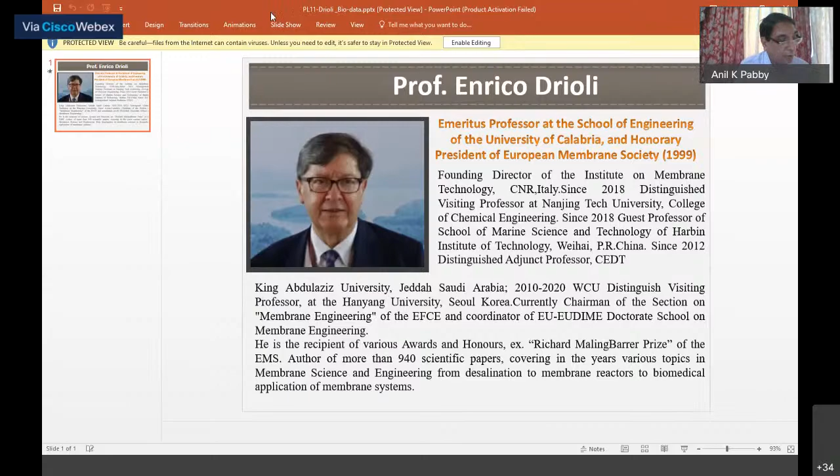Professor Enrico Drioli is the emeritus professor at the School of Engineering of the University of Calabria and honorary president of the European Membrane Society. He is the founding director of the Institute of Membrane Technology, CNR, Italy. Since 2018, he's a distinguished visiting professor at Nanjing Tech University College of Chemical Engineering, and since 2018, a guest professor at the School of Marine Science and Technology of Harbin Institute of Technology, China. Since 2012, he is a distinguished adjunct professor at CEDT. He is also currently chairman of the section on membrane engineering of EFCE and coordinator of EU-EUDIME Doctorate School on Membrane Engineering. He is a recipient of various awards and honors, including the Richard Maling Barrer Prize of the EMS. He is the author of more than 940 scientific papers covering over the years various topics in membrane science and engineering, from desalination to membrane reactors to biomedical applications of membrane systems. I am very fortunate to introduce Professor Drioli, and I request him to start his presentation now, please.

Thank you very much. Pabby, it's a great pleasure for me to participate in this conference. Sorry that it's only a virtual presence and not in Kolkata, but I hope we will have the opportunity of meeting soon again in a real, normal way. What I'm going to discuss today is the state of the art of membrane engineering, and the contribution membrane engineering is giving to the growth of the sustainable industrial world we are living in today. But what is more important, from my point of view, is to try to show you not just what has been done, but what is going to be done in the next decades. Membrane engineering is not at steady state, it's not at the end of its development. It's just, in my opinion, at the beginning.

If I can have the first slide... can I have the first slide? What is it? Sir, your sharing has stopped. Let me try to share again. Yes, yes, is it okay now? Yes, now it is okay, sir.

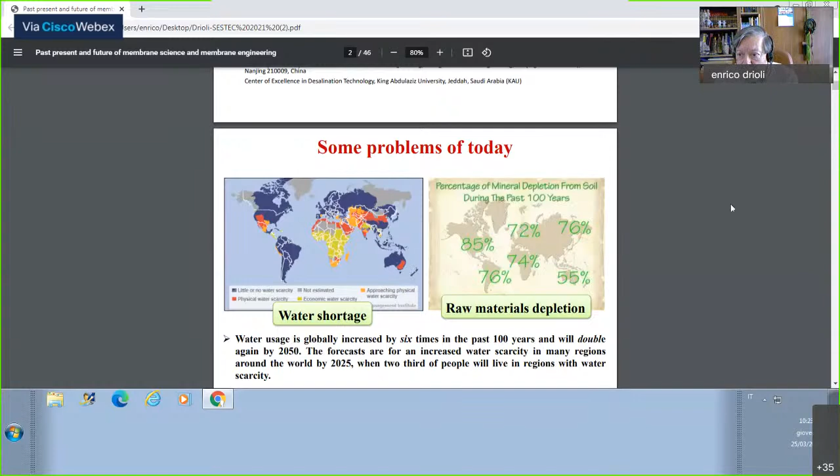Everybody is familiar with the fact that we have significant problems today, particularly water stress. Water shortage is one of the main issues. However, there are other topics that are a little less familiar to the large public. Another issue where membrane engineering will have a role is raw materials depletion. As you can see here, in the last 100 years, from 85% to 55% of the minerals on Earth from traditional mines have practically disappeared. We now have a significant necessity to find a solution to this problem, just as for water stress. It's important that these two problems can be correlated.

Now, what is important is that if we don't do something to solve the problem of recovery of these minerals, in a few years, from 10, 15, 20 years, these minerals will disappear. All of them, everything that we are losing during traditional way of doing, basically at the end are in the ocean.

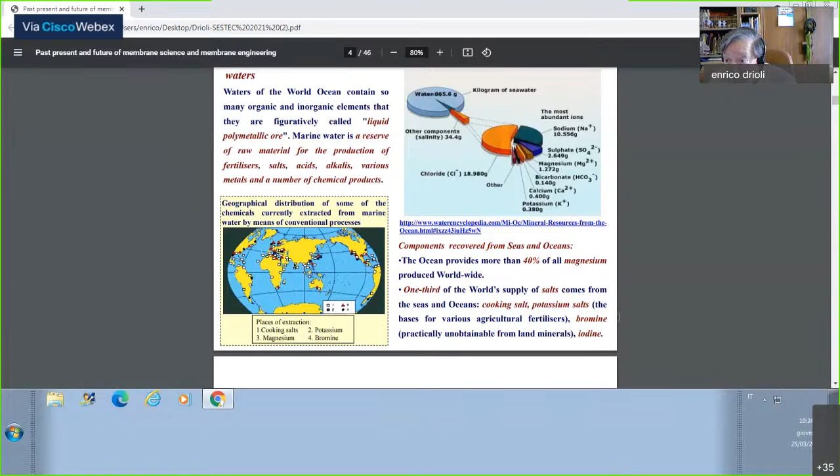And that's why we can call the ocean a liquid polymetallic ore. Some people are already using this kind of figure. We already are trying to recover some minerals from the water, from the sea, from the lakes, from rivers, but this only for few minerals and traditional ones, as potassium, as iodine, sometimes sodium chloride, obviously.

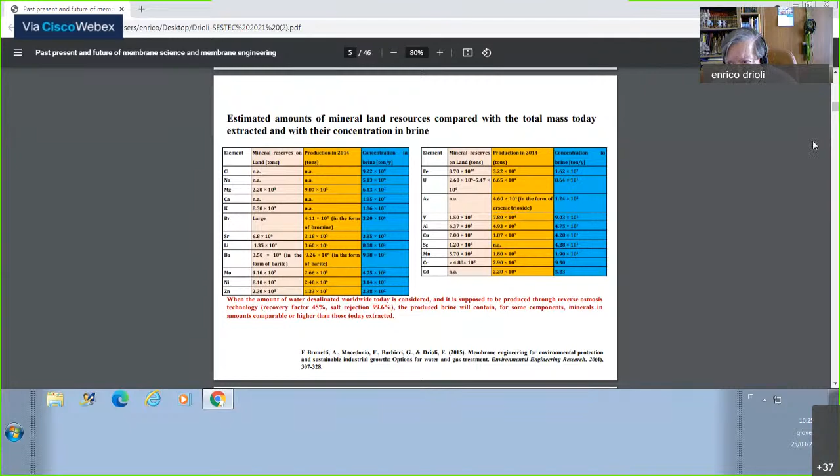Today it is called a problem, the brine disposal problem, which is growing with the large growth of desalination plants. But in perspective, this brine will be the most important aspect of most part of desalination. Desalination will not be for producing fresh water. It's also fresh water, but mainly will be to extract minerals from the liquid phase, from the sea, from the lakes, from the rivers, etc.

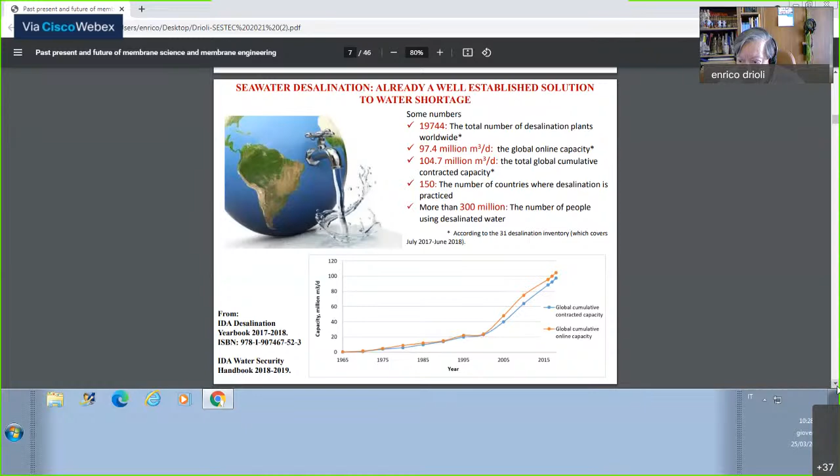And if you start to work on them, that will be a significant contribution to minimize the disappearance of minerals that I was mentioning before. Reverse osmosis is a dominant technology. However, we still have problems to be solved.

Otherwise, you cannot discharge the brine on the land or back in the sea. You are going to destroy the bottom of the sea. So that is a problem, and it's an additional cost.

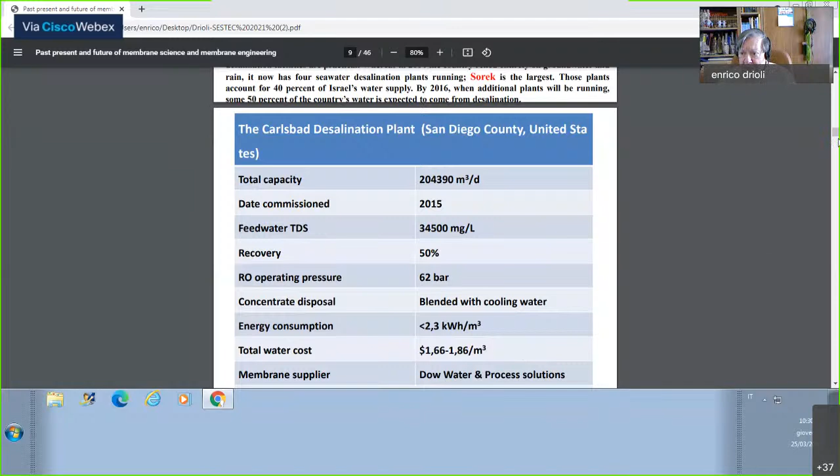One way to solve the problem is the one I was mentioning before, trying not only to look at the fresh water you are producing, but also to look at the concentrate, the brine, for minimizing the overall cost. Just to give you an example of what is the expectation, assuming the plants as they are today, as the one in Sorek.

You can see here that during this year we have significant growth of the seawater desalination RO plants in terms of capacity. The plants today are mostly of the order of 700,000 cubic meters fresh water, approaching about 1 million, and 600,000, 500,000, etc. And this is the new one in Saudi Arabia, 900,000 cubic meters.

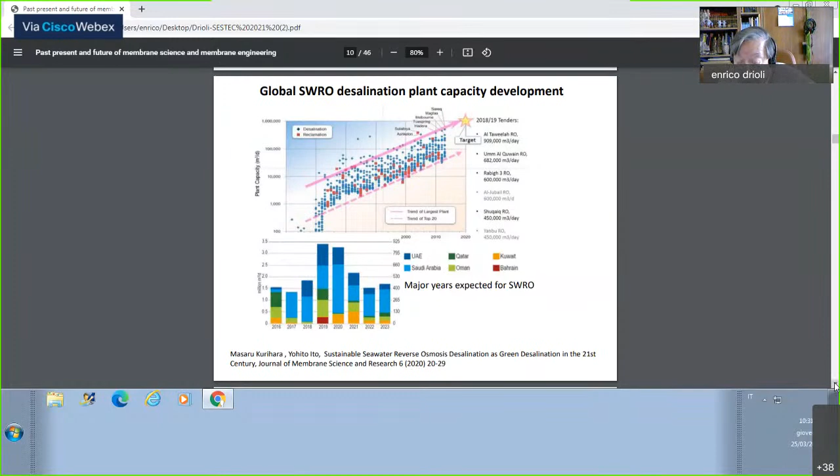So big success, but still we have to try to minimize the negative aspects. The recovery factor in all these plants is still of the order of 50%, sometimes less, and the overall problem of brine disposal is one of the major problems to be minimized and is a relatively high cost. Keep in mind that there is big success in desalination, but we have similar interesting results in other fields.

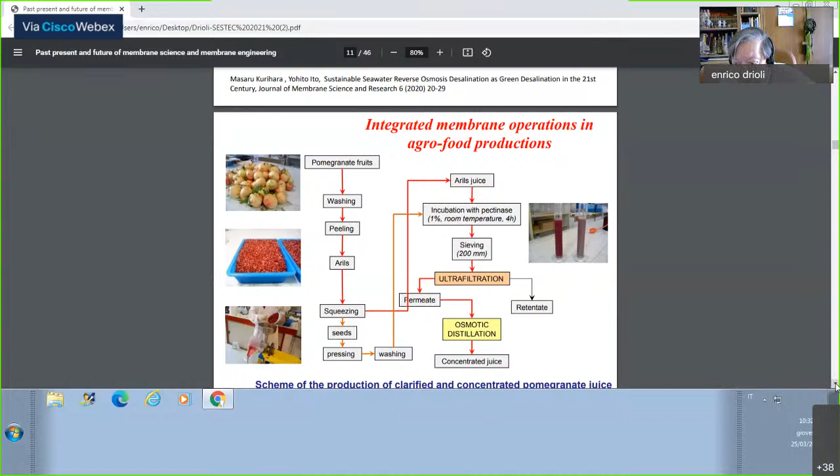For example, the dominance of reverse osmosis in desalination, today in integrated membrane operations in agro-food production, both for concentrated juice or for high sugar content, is becoming more and more traditional. Less familiar to the large public, no big advertisement on this kind of activity, but apple juice, orange juice, and many other juices today are also produced by combining different membrane operations such as ultrafiltration, reverse osmosis, and osmotic distillation if you want to approach a high level of concentration.

So this is not only desalination.

When we are talking about membrane distillation, I assume most of you are familiar, but it's interesting to notice that on one side RO is already a dominant technology, but on the other side there is still significant progress in the last few decades. Here is the case of membrane distillation, which basically was a scientific curiosity at the end of the past millennium, in the 1990s. Starting from the 2000s, it is increasing exponentially.

That means that this process is not yet applied on a large scale, no big industrial utilization yet, but you can see here what is happening. And together with membrane distillation, you can see what is growing also, significantly less, is the membrane crystallizer, which is nothing more than an advanced utilization of the basic units and the basic concept of membrane distillation.

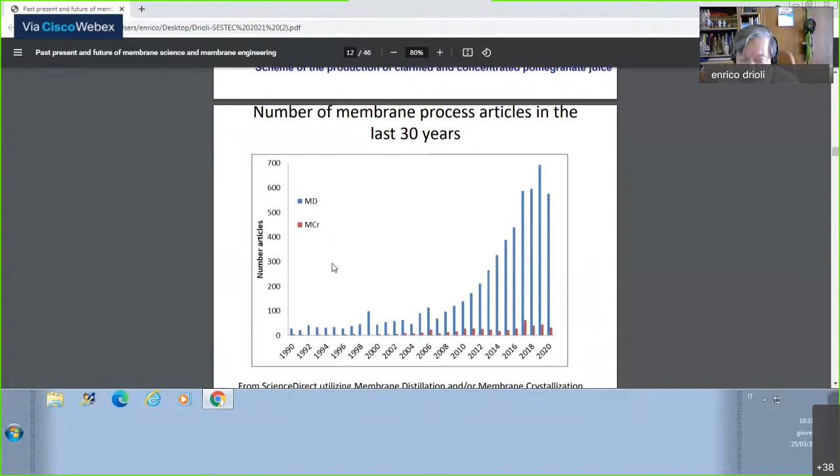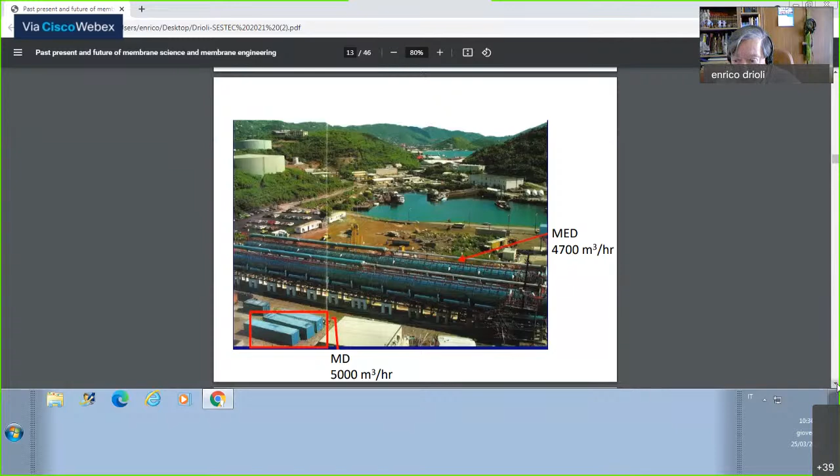To give you an example of what is happening, the motivation for this, here's an interesting comparison between the classical thermal system - I mean 4,700 cubic meters per hour, that is the unit - and the footprint of the same 5,000 cubic meters per hour MD, doing the same with the same productivity. Footprint is becoming today a quite significant parameter in terms of cost, the final cost of the water you are producing.

It's interesting that the concept I was telling you before is becoming very popular in some countries. In Korea, they are talking about the third generation desalination system already, in which reverse osmosis is already present for producing fresh water, but the concentrate of RO is no longer a problem. They are not speaking about the brine disposal problem anymore.

They're talking about what to do with the concentrate, using membrane distillation, pressure retarded osmosis, and recovery, crystallization, and all the membrane distillation units for producing more water. That means increasing the recovery factor, producing energy, and recovering resources through membrane distillation and membrane crystallization systems. So the third generation desalination, a project that ended 2-3 years ago.

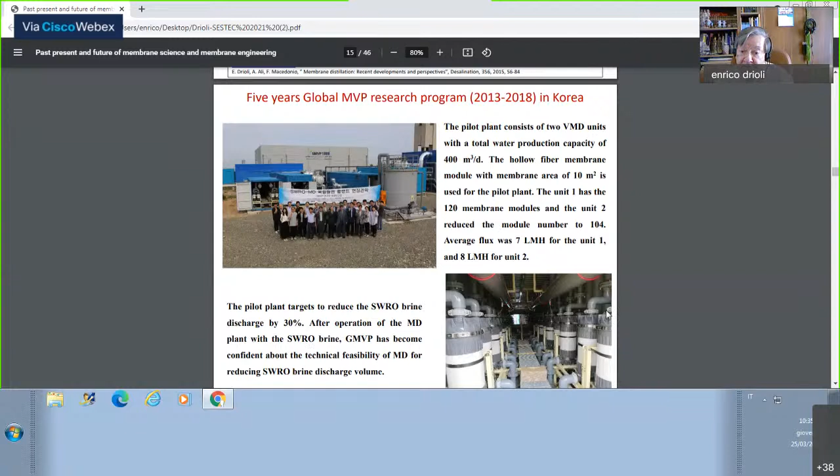Is already well accepted in countries like Korea, still at the research stage. You can see here, at the end of this project in 2018, a vacuum membrane distillation unit producing about 400 cubic meters per day was installed in the south of Korea near Busan, with interesting results: reduction of the brine discharge by about 30%, increasing recovery factor, and recovery of minerals. Quite interesting, and this kind of concept is today becoming popular in different countries.

Another area of significant success already now that we have to consider are the membrane bioreactors. You can see here this situation, a traditional municipal wastewater treatment, with 1, 2, 3, 4, 5, 6, 7, 8 different units working together.

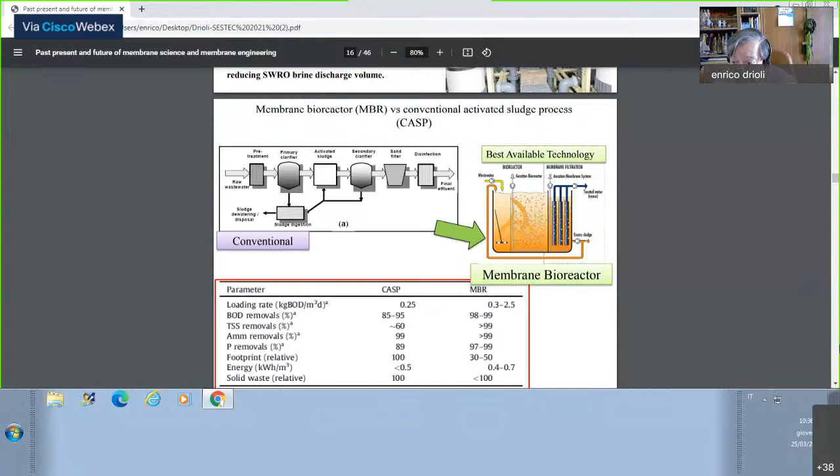If you go to the best available technology, which in Europe is considered MBR, you can have basically 1 or 2 units at most instead of 7. And if you look at the parameters, the optimization, all the parameters for the MBR are competitive or significantly better than those of the traditional biological system still in operation everywhere.

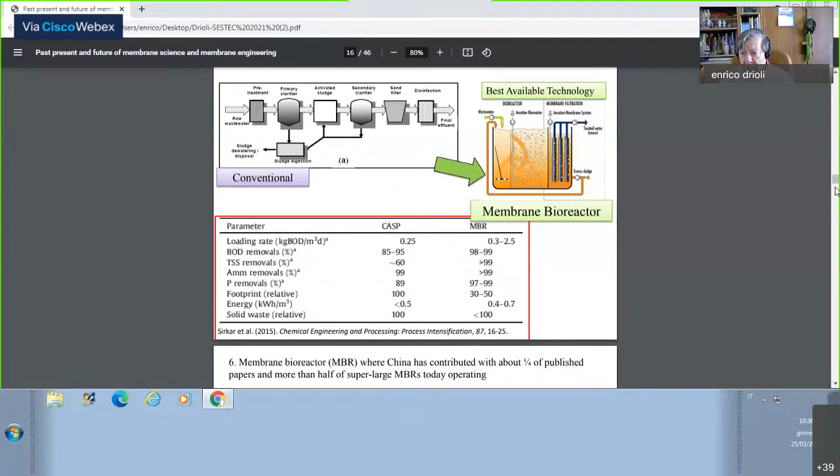It's interesting to see that the trend worldwide for growth, as we saw before in membrane distillation and in reverse osmosis, shows the same trend. Starting from this century, everything is growing exponentially. In terms of patents, publications, and large-size plants higher than 10,000 cubic meters per day, growth is exponential all around the world.

It's interesting that one country, particularly China, is working significantly with this kind of unit. They are using MBR not only for normal municipal plants, mainly utilized in Europe, but for underground municipal water, industrial water, and polluted surface water, all treated today with significant success based on MBR, and MBR of large size - not just small units. That is fast growing, unexpected 20, 30 years ago, but that is the situation.

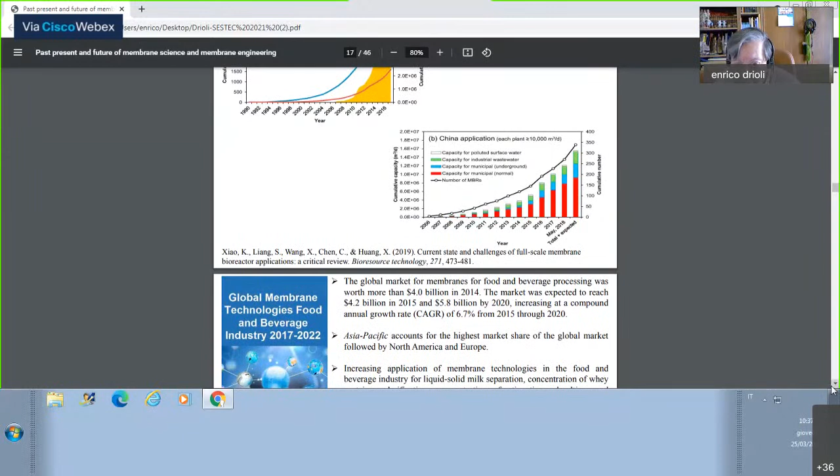I was mentioning before about food, and you can see the same in food. The market is growing, as I was showing before, based on this integrated membrane operation - something very similar to what has been happening in the desalination of seawater, and in the treatment with MBR of traditional municipal water.

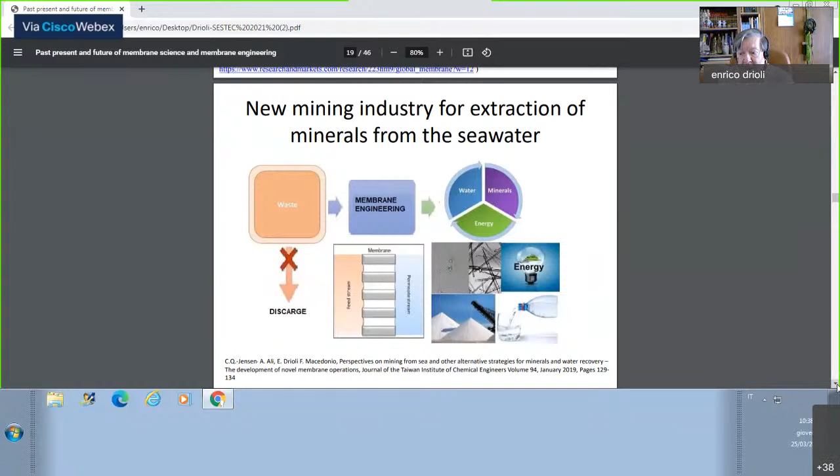In the perspective, this does not happen yet on large scale, still a project, but assume that what will happen, not too far from today, is that we can develop a new mining industry. This new mining industry will be mainly devoted to the extraction of minerals from seawater. The integration of the 3 final goals - energy production, minerals production, and freshwater production - will make the industrial sector treating liquid water quite interesting and quite profitable.

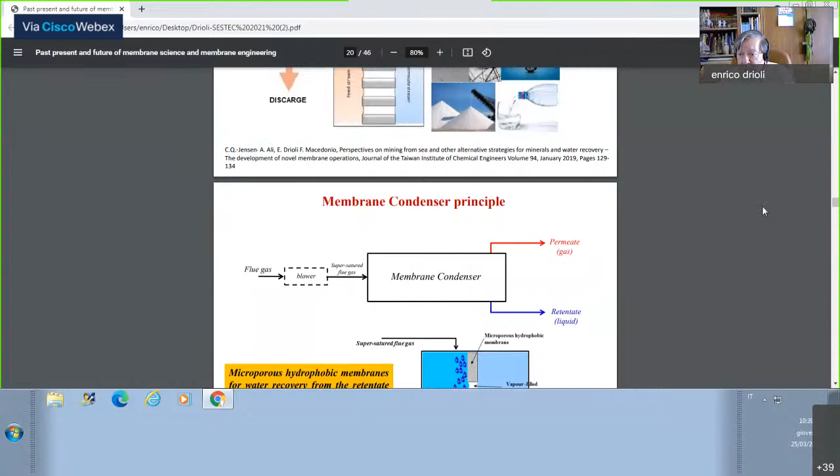Let me just mention shortly that until now we are used to solving water stress by looking at the liquid water phase, but there are other possibilities. Today, particularly in Europe, the European Union is sponsoring a large project using a membrane condenser. Membrane condenser is not too different from membrane distillation, with one major significant difference: instead of warming up, instead of using on the feed side liquid water and warming it up to create vapor that will go through a hydrophobic microporous membrane, you cool down.

You can cool down flue gases. So all the gases present in the atmosphere, produced on large scale in the cooling tower of a power station, in the petrochemical industry, etc., you can try to extract the water present by cooling down and transforming - having not evaporation, but condensation. This water, if you are using a hydrophobic microporous membrane, cannot go through in liquid phase and will stay on the feed side, and eventually you can combine this recovered water together with contaminants, ammonia and other compounds that are sometimes present in the atmosphere, which can be recovered and reutilized in a different way.

That is not yet applied on large scale, but interesting projects have been sponsored. That is the case in which we have been involved. MATChING was the name of this project, working on all the water that is evaporating from the cooling tower of the power station - all this water present can be just transformed back into liquid phase and reutilized.

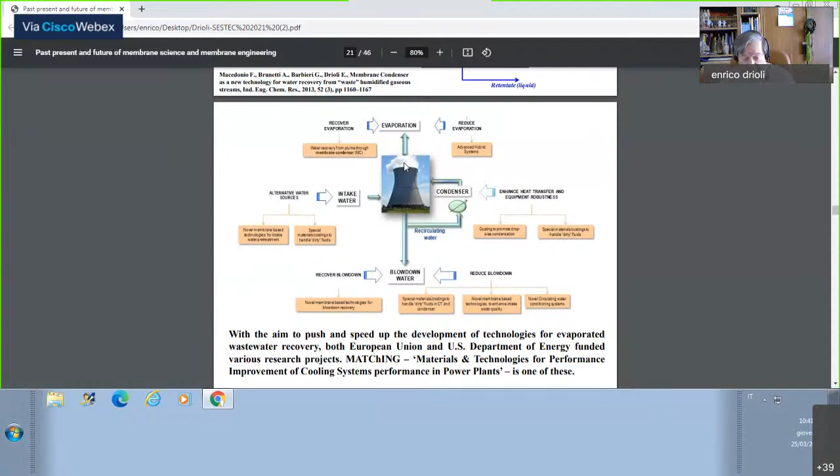With time, this will not be only for water recovery, which can already be quite an interesting success, but also for other kinds of contaminants eventually present in the vapor phase. You can already find some of these in the literature. This MATChING project ended a couple of years ago, but interesting hypotheses are still in progress.

For example, in the recovery of water from nuclear power stations, there's also a lot of problems related to contamination, etc., related to this kind of flue gas that we are losing in the atmosphere.

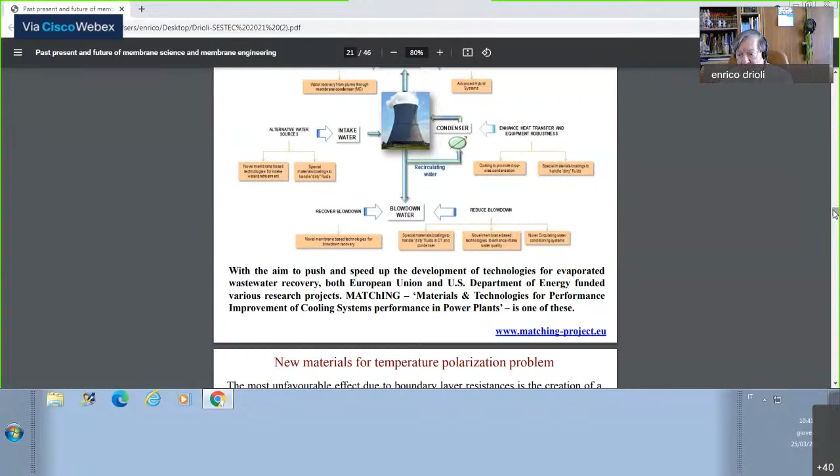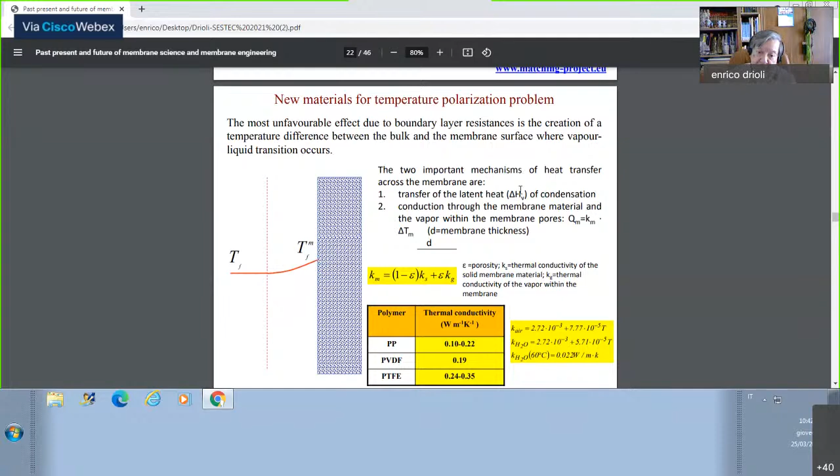Concentration polarization is less severe, as you know, in membrane distillation and also in membrane condenser, but if you really want to solve this problem at large scale, temperature polarization has to become familiar to people working in this area. Temperature polarization, sometimes combined also with concentration polarization, is one of the major issues to be solved. And solving it is not only a question of fluid dynamics and control of the temperature profile or concentration profile, it's also a question of materials.

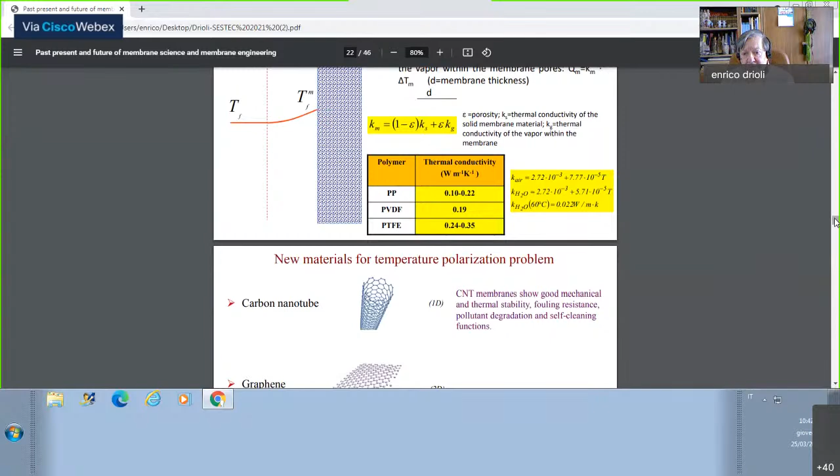So we have to look to new materials. For example, there is a lot of interest today for graphene or carbon tubes, etc., which in principle are not too attractive for membrane distillation. Graphene has higher thermal conductivity than many other materials.

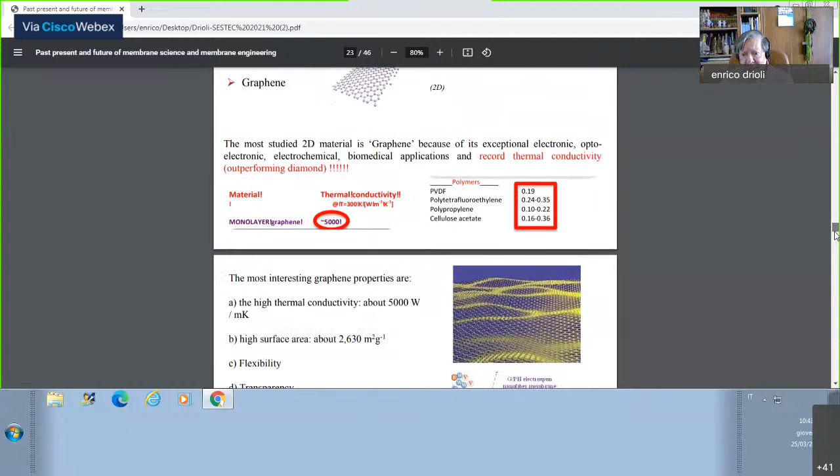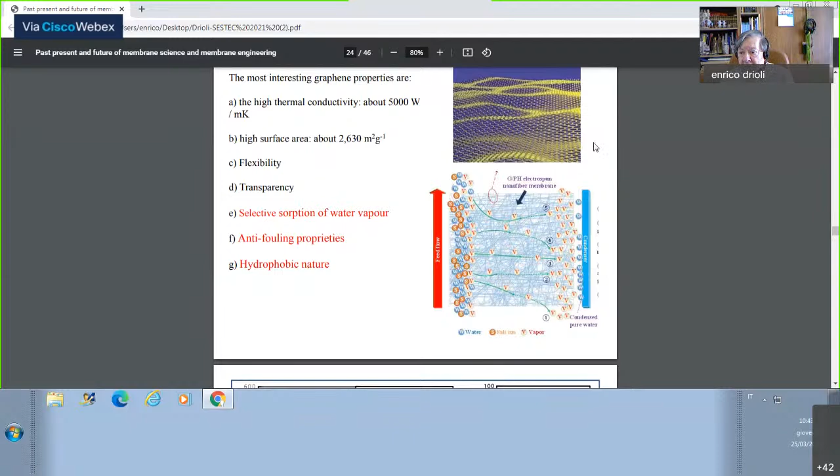However, if you are looking at this material in a membrane condenser, this very high thermal conductivity can help significantly in solving the problem. That's why today membranes related to graphene or other 2D bidimensional materials are becoming quite interesting, and the selective sorption of water vapor, antifouling properties, hydrophobic nature, and high thermal conductivity are the parameters making this work quite interesting.

You can find in the literature already data showing the possibility to recover water with this membrane condenser, with some kind of membrane. Also, new polymers are used in this case.

The amount of water recovered is normally about 50%, 60% easily. New polymers are competing with the traditional ones. PVDF is the one everybody is using today, or polypropylene, but with ETFE, this ethylene tetrafluoroethylene system, performance is quite similar, more hydrophobic, and a little bit cheaper than other fluoropolymers. So new materials are also part of the studies that have to be carried on.

Interesting that you can operate this membrane condenser not only with flue gases, but also with flue gases contaminated with microparticles, which are very often present.

Here are some results already published in which you can find this kind of suspension with polystyrene particles of the order of 0.5 microns, and you can have a retentate with very high concentration of these nanoparticles, but the permeate is quite clean, nothing is going through. This is with more than 61 hours of operation.

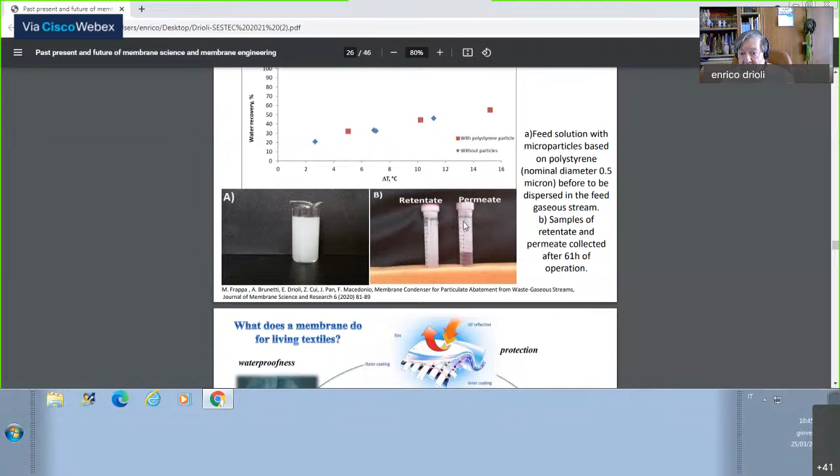Looking at what is happening today, technical textile is one of the areas of interest. Today you can use textile not only for protecting yourself from cold temperature or humidity, but there is a lot of other possibility, just by changing the structure, the morphology of your textile—including a sensor, realizing textile with a significant level of breathing, and you can capture particles, release particles, etc. So technical textile is another area in which the functional textile industrial activities are growing significantly.

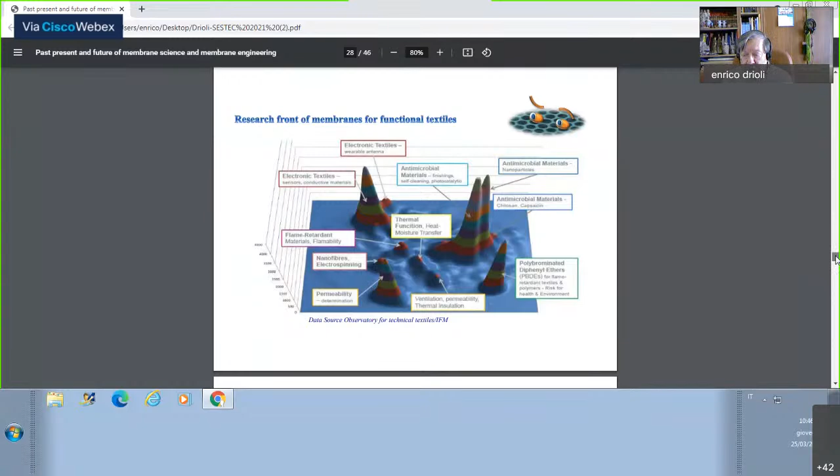We are talking now about India, China, and other areas where there are significant activities trying to produce new textiles where thermal function is present, antimicrobial material can be utilized and combined, and electronic sensors can be installed, etc. This seems to be far away from traditional membrane activities. It is not—the basic aspects, the basic functions that you have to understand are traditional for the membrane researcher.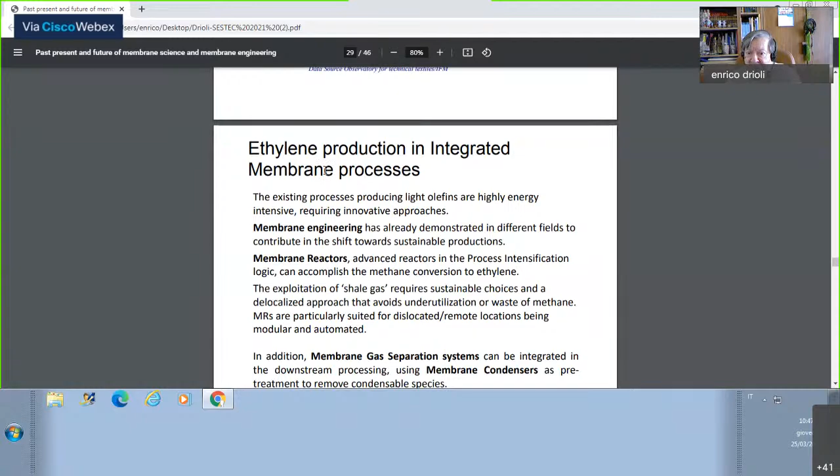It's quite interesting that you can also redesign some of the most polluting and traditional large-scale production that we have in the petrochemical world. Ethylene production, which is a significant problem in terms of pollution and cost, can also be redesigned based on an integrated membrane process.

You can find in the literature already this kind of system where, instead of using cracking of naphtha, using different kinds of biomass or biogas, you can just introduce membrane reactors basically in the production of ethylene itself—in the separation between the extraction of hydrogen, in the transformation of ethylene into ethanol, etc., etc.—without any loss basically of the CO2, where the membrane system takes care of optimizing this integrated membrane process.

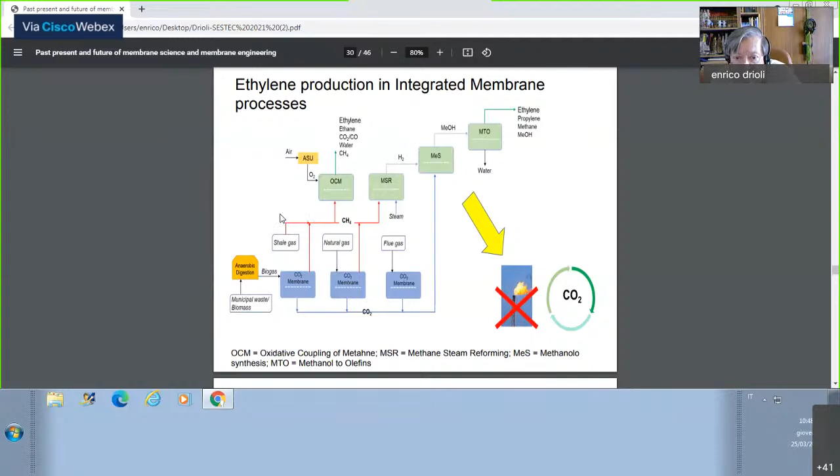If you go in the literature, also here you can find that oxidative coupling of methane, methane steam reforming, methanol synthesis, methanol to olefin, etc., are all membrane units present in not yet a real ethylene production, but this is work done together with engineers who are realizing traditional systems, and they are quite interested in what can be done now. It's not convenient in terms of cost, etc., but the solution to all the problems related to CO2 production and different kinds of poisoning in the air is related to this kind of hypothesis, in which the experts in ethylene production are not unaware—they are not ashamed to put also their name on it.

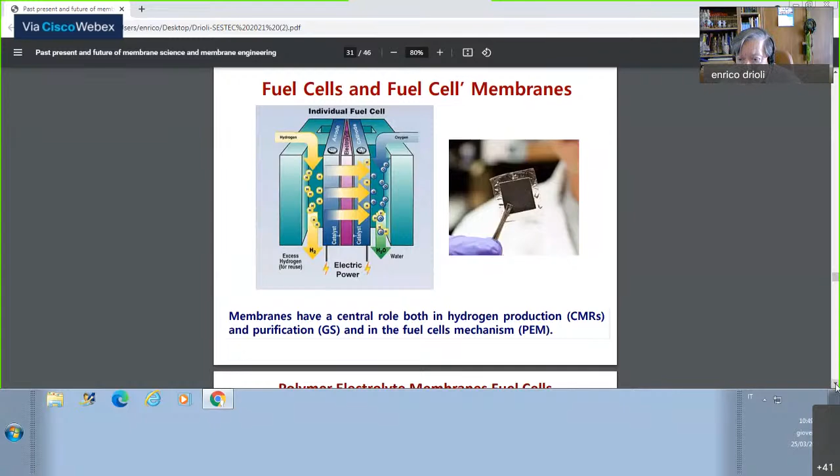Another area where membranes are quite successful is energy production, and fuel cells are familiar to all of you. Today, more and more, when we talk about electrical cars, fuel cells are present. I just want to show you that it's not only a question of membranes in the traditional fuel cell, but all the fuel cells we use on board of the car, etc., are mainly based on hydrogen-oxygen reaction, or eventually methanol, but the system's hydrogen is not present in nature.

So we have to produce hydrogen for our fuel cell. It's interesting that in the station where you have a hydrogen reservoir, or on board your car where hydrogen is produced, again membrane systems are present. These are all from methane, for example. You have steam reforming, water gas shift, and final purification with palladium membranes before arriving at the fuel cell itself. So membranes are not only in the core of the fuel cell, but are also fundamental in supplying the clean hydrogen necessary to operate the fuel cell itself.

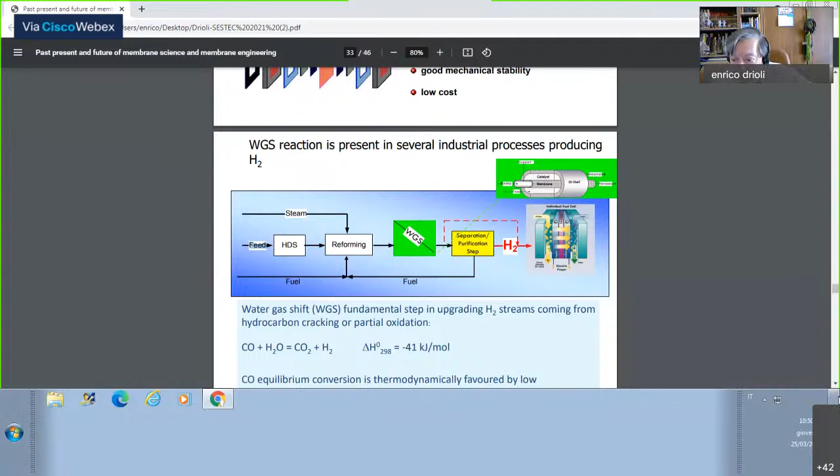And more and more, this is becoming interesting: small integrated membrane operations of a size that can stay in the back of your car. Quite interesting and quite promising, and this is growing significantly.

So we have to pay more attention to what is happening here. In Europe, we have been spending some time, and we've had companies—Norway, for example—working already. It's still too expensive, but shortly, in my personal opinion, related to the increasing cost of energy, but also to the decreasing cost of membrane systems, this 17% can have a role much more significant than the one recognized today in the traditional approach, which is zero. No one was suggesting using this blue energy in real life.

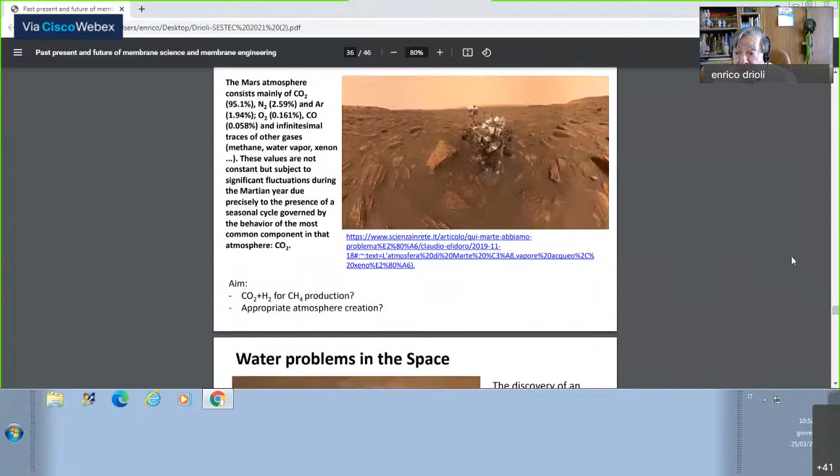And pressure retarded osmosis, with the system giving... The most interesting new future will be, however, related not only to the development of new textiles or to the development of the fuel cell, etc., but to what is happening today in space engineering.

I don't know how many of you are familiar with the fact that if you go to Mars—and here is the typical example—the atmosphere of Mars is basically 95% CO2. And on Mars, where we will probably land in no more than one decade, or maybe two, 10 or 20 years, there is no oil. There is no energy production in the traditional form we are used to. There is no coal. There is a lot of CO2.

But now CO2 can be an interesting source, and there's a lot of research progress in traditional membrane technology, or in traditional industrial chemistry, to transform CO2 into something of interest, for example methane. This is one of the possibilities for developing a system where membrane engineering will contribute to life in space.

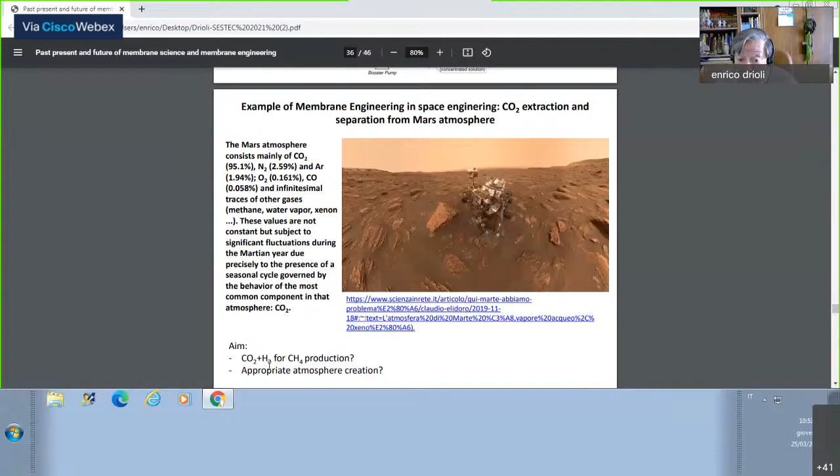We also know that CO2 plus hydrogen can give methane, and now we know that on Mars we have water—water is becoming something that exists. This is ice under water, cold water present on the Mars surface, and we will learn more about this.

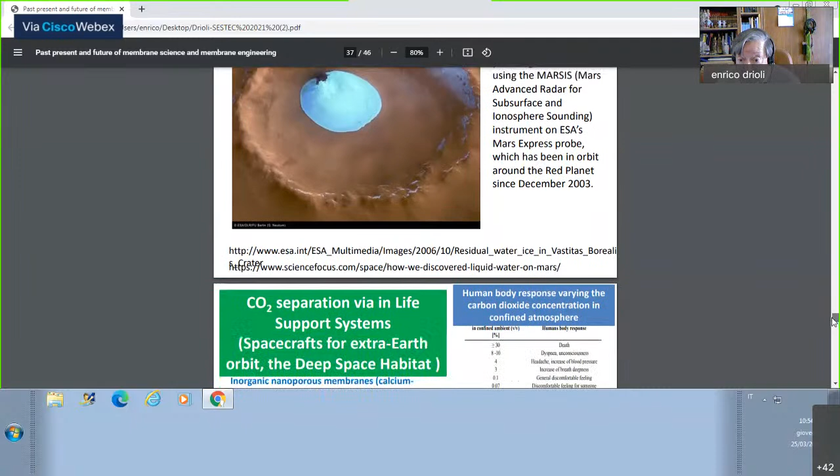Already today, a lot of activities related to membrane systems are in progress in space applications. Here you can find, in a recent review we just published called 'Membrane Technology in Space Engineering' that came out a few weeks ago, a lot of new membranes.

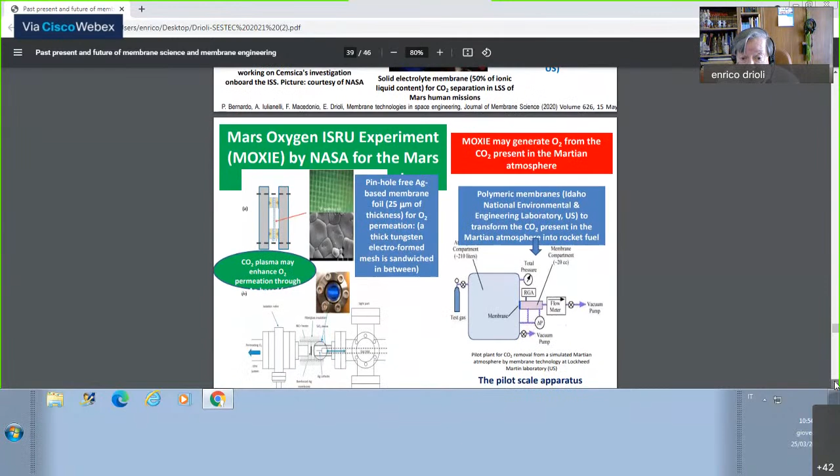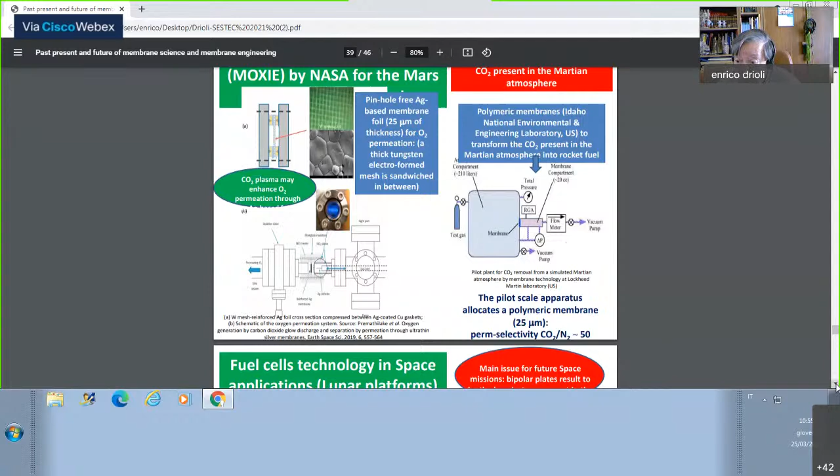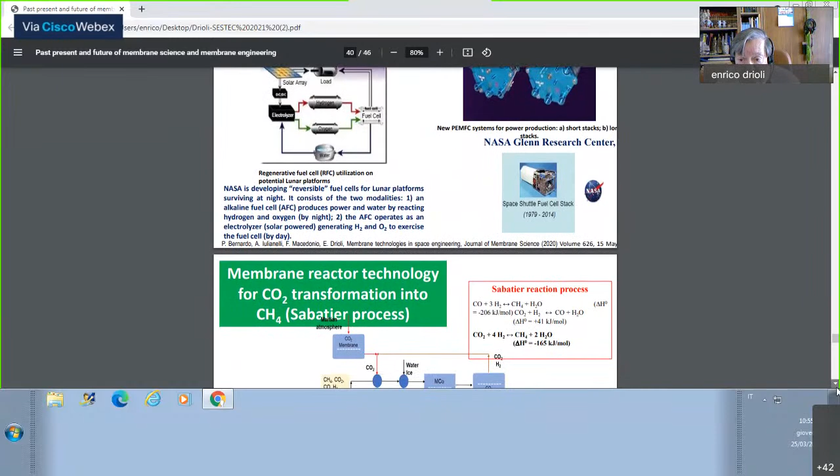And here you can find many other systems of interest already in progress, with traditional polymeric membranes, with a system to generate oxygen from CO2 in the Martian atmosphere, etc. Time is running short so I cannot spend too much on this, but if you want to know more, in this recent review paper you will find a lot of information, including how fuel cells will operate in space, and in the lunar platform, where they are already present. It's important to consider that we have had long experience with this in the past.

If you go to Toulouse in France, where I'm also honorary professor, you will find that Paul Sabatier University is one of the most familiar there. Paul Sabatier is related to the name of a chemist, Sabatier, who studied the Sabatier process. The Sabatier process is nothing more than CO2 plus hydrogen giving you methane, what we will need on Mars. That has been less utilized today on Earth, but will be quite interesting to check and operate in space. In the future, it will happen with the 95% that we have there.

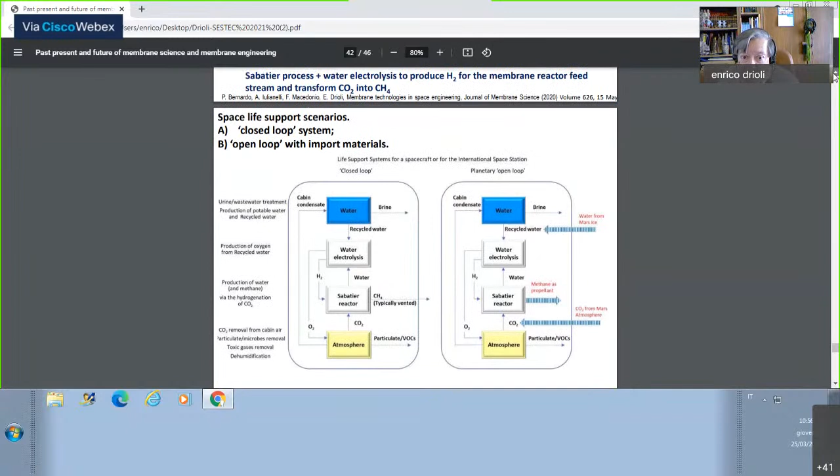These are interesting systems with support scenarios, including loop systems and open systems where membranes do the job. Introducing this from different kinds of atmosphere and going through the Sabatier reaction, water electrolysis, etc., we can produce the energy and methane necessary.

Just to approach the conclusion, around the world there is growing attention to what is happening with membrane engineering. I'd like to mention something important happening in China. There, they are growing not like Silicon Valley with IT and technology, but exploring what they call membrane valley.

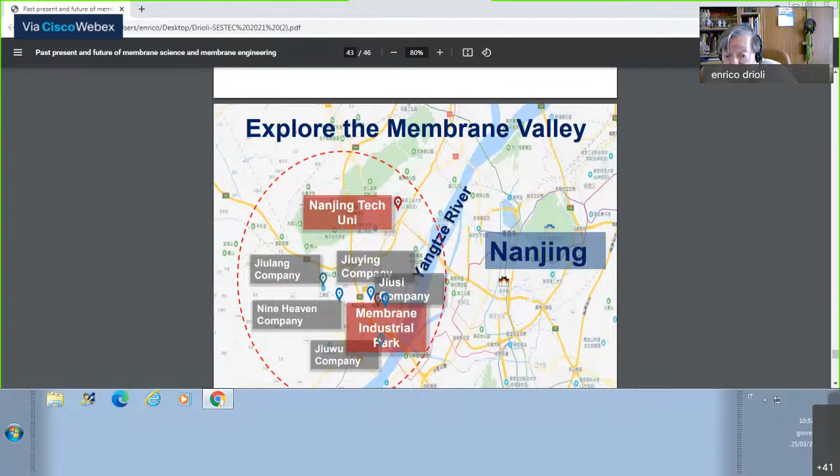In Nanjing, around Nanjing Tech University, there is an industrial membrane park, already now 60,000 square meters of installation, going to be in 1 or 2 years 240,000 square meters, 3 times bigger than the one already there, where companies are already in operation producing industrial-level membrane systems with success. There are already companies producing ceramic membrane, zeolite membrane, PDMS composite membrane, gas cleaning membrane, PVDF hollow fiber membrane, all in this large membrane valley park.

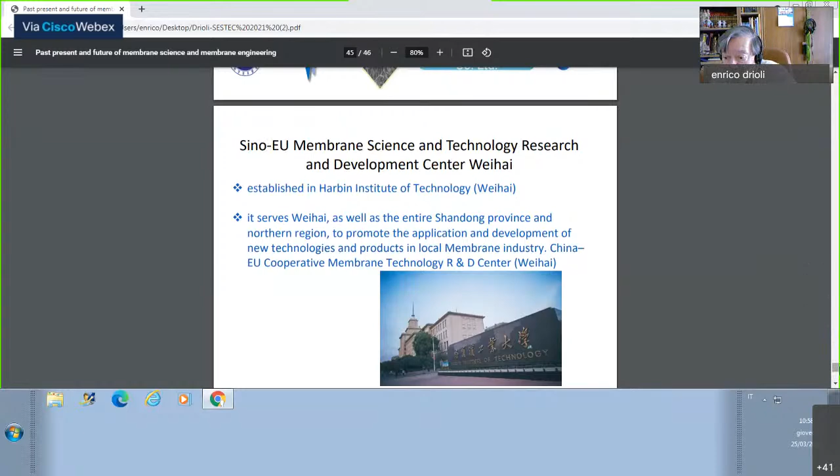That's quite interesting, and not only near Nanjing. If you go to another part of China, Shandong, last year in 2019, they created another membrane science and technological research center in combination with European researchers. The first operation started in July 2019, and today in this industrial membrane park there are already different companies from the United States, from China, etc., in operation.

That's quite important, and we have to take care because the competition for utilizing membrane technology at industrial level is growing, not only in traditional fields like desalination, food, textile, and pharmaceutical and biomedical applications, but in new fields like space engineering and living on new planets. This will very much interact with the possibility to realize, not only on Earth but in space, all the success of membrane engineering.

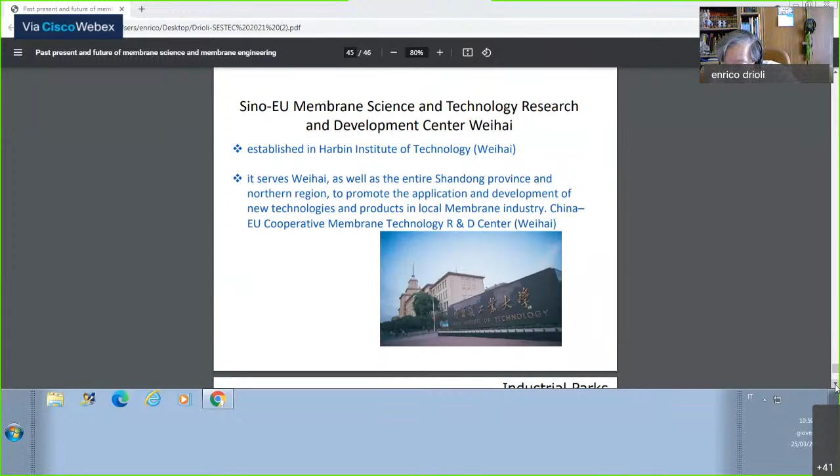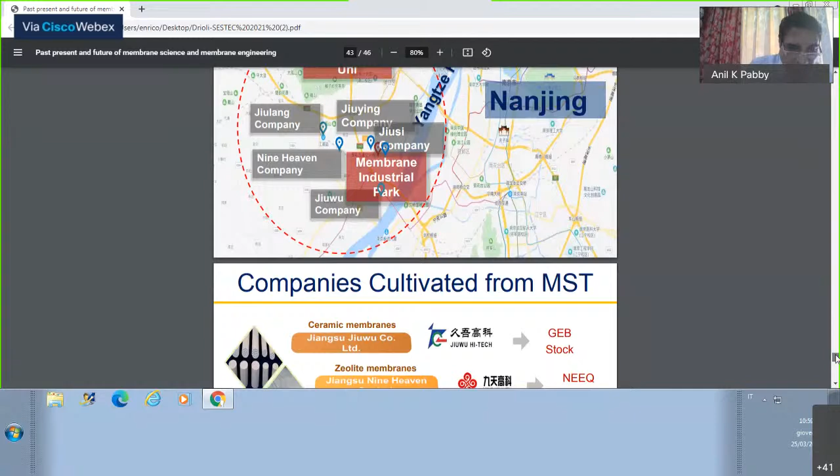Thank you, Professor Drioli, for your excellent talk with lots of future perspectives. I'd like to give a small compliment: we celebrated Water Day on the 22nd, and after looking at your presentation, I felt that we were timely. You had your presentation regarding water and what you explained about water, the water crisis, and exploitation of membrane systems for getting pure water for humans. So what I mean is we could not have your talk on the 22nd of March, but at least we are in the same week.

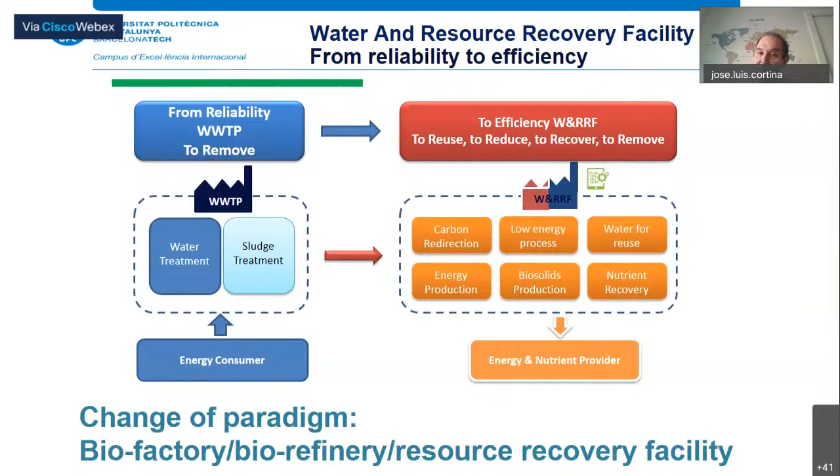Sorry for that, I was just trying to explain that wastewater treatment facilities are now moving from their initial conception of relying on removal of the organic or pollution load present in the water. As a consequence, these installations needed energy to operate. In the effort to reduce energy consumption by taking benefit of the organic load, or the carbon content present in wastewater, everything has been modified. This is a new concept for such facilities, now understood as resource recovery facilities. You will find in the literature people talking about wastewater treatment facilities becoming biofactories or biorefineries, or depending on the company, identified as resource recovery facilities. To understand why, for example, it's going to be possible to recover nutrients, as I'll show later, let's start to understand the first action that should be taken.

The first action that should be taken is to make this facility energy self-sufficient. We need to modify the classical conventional activated sludge process, shown here in this scheme, where after a primary treatment we move to a secondary treatment where, using microorganisms, we mineralize part of the carbon which is lost as CO2, and then the biomass is sent to the anaerobic digestion stage where we are able to recover biogas. But this is not enough to be energy sufficient, so we need to increase the amount of carbon sent to this stage. This has led to the development of a new concept, identified as two stages, or A and B stage.

We remove this biological reactor, and then we have a first stage where, with a very short retention time, we try to send the highest amount of COD that we have in the water to the anaerobic digestion to increase the production of biogas.

When accounting for this scenario, your energy self-sufficiency in terms of electricity requirements moves from the old 20 to 35% by the use of biogas, to close to, I think, even a little higher than 60%. We also have a second benefit: a carbon footprint reduction, because most of the carbon that was lost when converted to CO2 is now still converted to

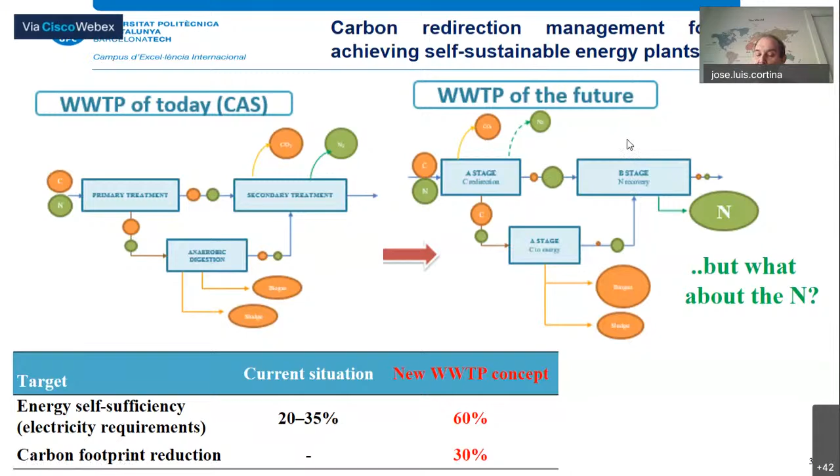biomethane. But in this new scenario, what happens is that we are going to accumulate in our mainstream a large amount of nitrogen, and then we need to provide a solution for this nitrogen.

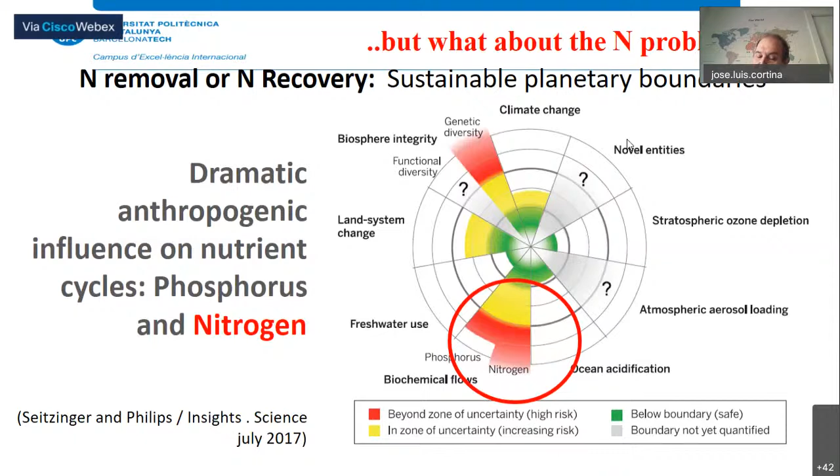Nitrogen has been considered for many decades a real dramatic anthropogenic problem, because it was related to the discharge of untreated waters with large amounts of nitrogen and phosphorus, which were responsible for the eutrophication process. Most of the effort was devoted to removing nitrogen, and the most efficient way is to convert it to nitrogen gas. But we are now facing a second sustainability challenge.

The growth of the population is increasing the need for fertilizers. According to the last estimation, the Haber-Bosch process used to produce ammonia accounts for a little bit more than 2% of the total primary world energy consumption. There are now many initiatives to reduce this impact of the Haber-Bosch process.

One possibility could be to recover the nitrogen from the wastewater treatment plants. If we come back to what is going to be our new wastewater treatment scheme, simplified here in a very simple way, I'm showing you the mass balance for the COD and for the nitrogen.

Let's take now only attention on the nitrogen, and let's take as a reference value 100. Imagine that we have as an input value of the total nitrogen 100.

Here we have the carbon redirection technology, where we try to maximize the amount of carbon that is going to be sent for anaerobic digestion. But now let's follow what happens to the nitrogen: a large amount of nitrogen is just not removed from the water.

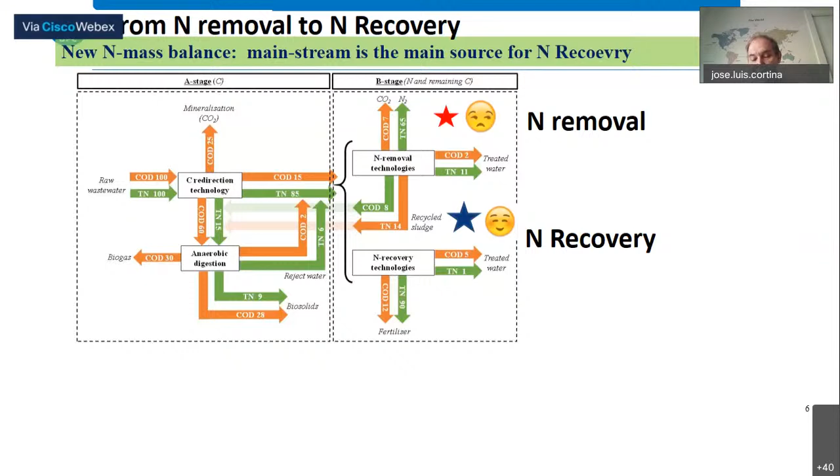Then the question is, there are many possibilities. Nitrogen has typically been recovered by using air stripping or even vacuum technologies, but our decision was a little bit different.

We put some key performance indicators for the selection of the nitrogen recovery technology, and we initially had some requirements or constraints.

If we are going to recover nitrogen from the mainstream of this new process, values of total nitrogen or total ammonia could be something between 40 to 100 milligrams per liter.

We want to produce a byproduct that has a high quality, because we identified that this byproduct could be used directly as a fertilizer for agricultural applications. We need to avoid the presence of pollutants.

A second objective was to produce a concentration of ammonium nitrate or ammonium phosphate, as typically used by agronomic applications. The target value for the content of our stream should reach the typical expected values for a liquid fertilizer, which is something between at least above 10% in content of nitrogen.

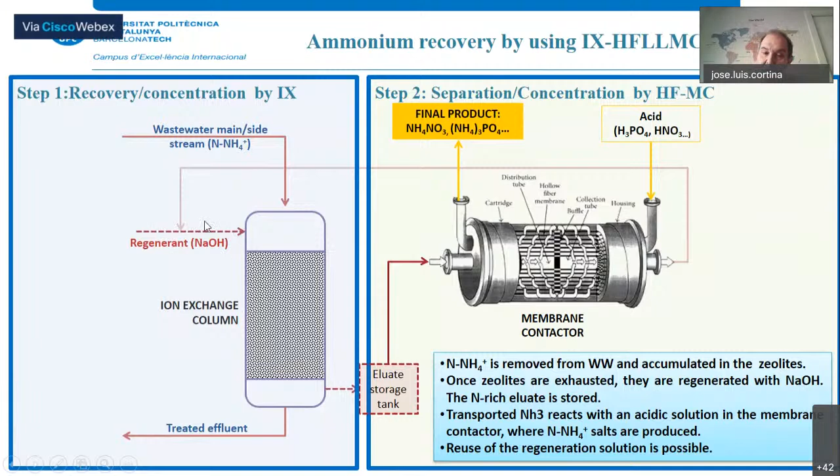Then we decide to test the system. We make the proof of concept working with synthetic solutions, using microporous hydrophobic membranes of polypropylene. The system works quite well.

It's removing very efficiently. We have two examples from one solution just after a concentration stage with zeolites, of 0.5 grams per liter or 1.5 grams per liter. If we keep the performance of the system, only ammonia is transported through the pores of the membranes to the acidic side.

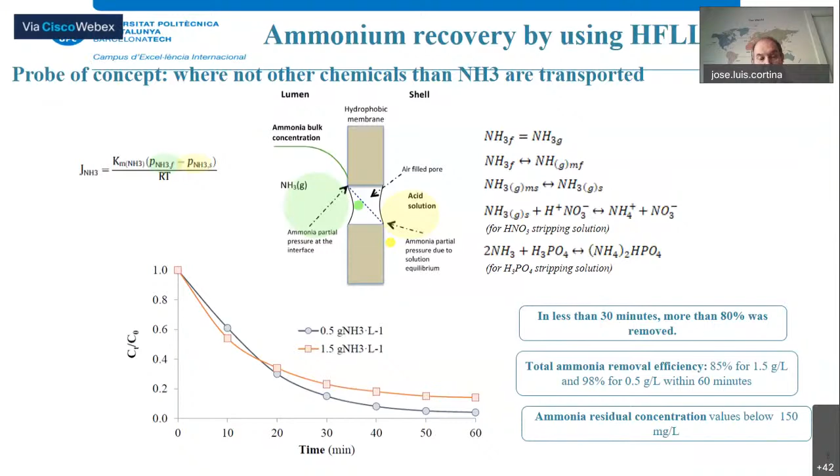But we have a second requirement: we need to have a very concentrated stream, as concentrated as possible, to reach the fertilizer requirements needed for being applied in agriculture.

We set up a system where we were working with the smallest volume for the stripping tank, and the largest one for the ammonia stream. The system operates in a recirculation mode. We tested whether one stage is enough, or if in some cases more than one stage is needed.

We were using polypropylene modules of 1.4 square meters from 3M. Depending on the strong acid used, we have a controlled pH where we should be operating - something between pH 2 to 3 when operating with nitric acid, and between 6 to 7 when using phosphoric, to avoid the formation of ammonium phosphates that precipitate in more acidic conditions.

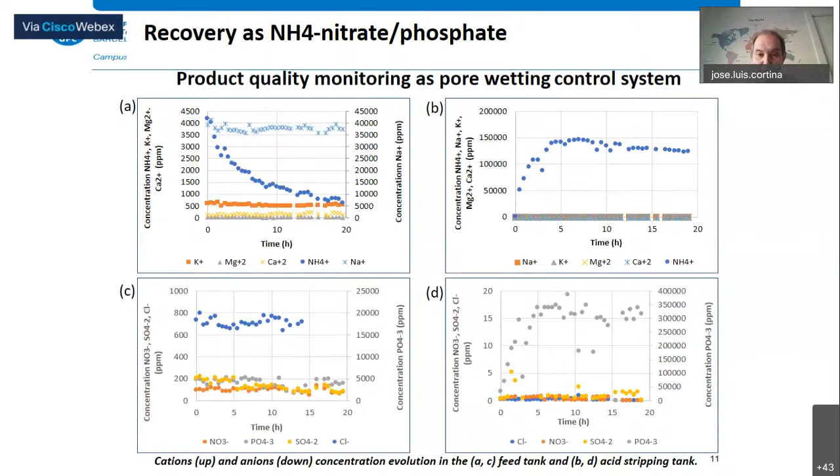A second part of the study was devoted to identifying the operation modes. We could say that even though there are many industrial applications for liquid-gas or gas-to-liquid using these hollow fiber membrane contactors, there are very few industrial scale cases of the application of liquid membrane contactors, especially for this case of ammonia removal. There were many doubts that the module provider could not give answers to, and they were not sure. So we were just checking if the module should be in horizontal or vertical position, and if the feed should be put into the shell or into the lumen.

We were evaluating all these performance indicators in terms of operation modes, using the quality of the fertilizer produced, following the recovery factor, and also the evolution of the mass transfer coefficient along this filtration stage. Here you have the values for some experiments with phosphoric acid, and here some experiments with nitric acid. Finally, I think we identified that modules are probably better operating in a vertical mode, with the feed containing the ammonia and sodium hydroxide solution sent to the shell, and the acidic stream running through the lumen. This is in relation to the operation mode.

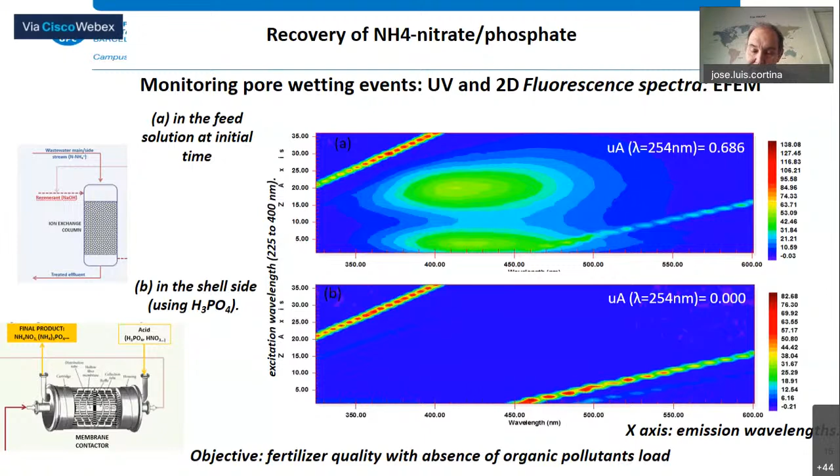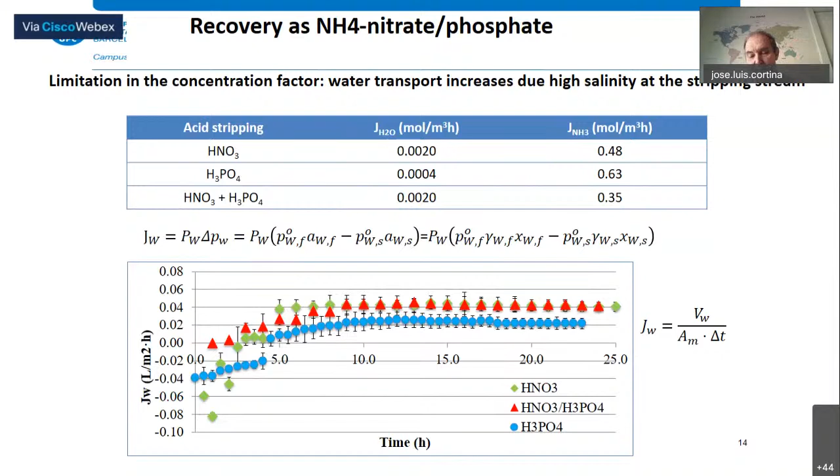In relation to the water transport problem, we face a limit where we're not able to get a fertilizer with a nitrogen content of more than 10%. We tested the possibility of increasing the concentration of the liquid fertilizer by installing a second concentration stage using electrodialysis after the liquid membrane contactor. Electrodialysis has been successfully applied for many decades in Japan for concentration of seawater to produce table salt.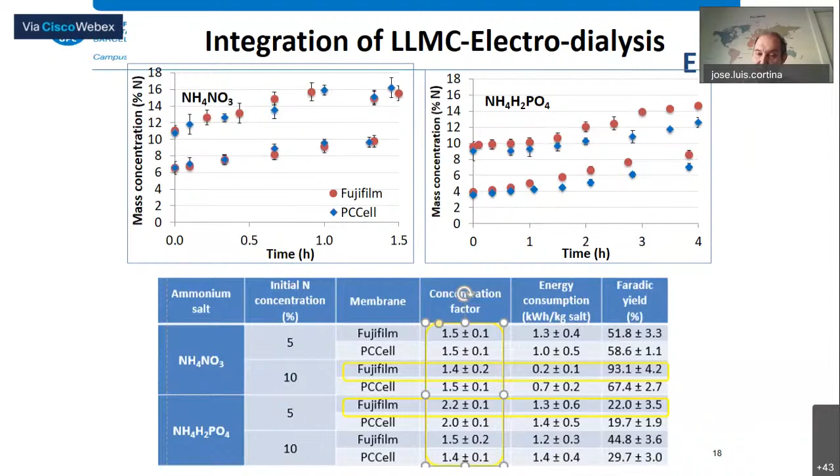But it's a possibility, or a final possibility, if you have not been able to reach the requirements in terms of concentration of the liquid fertilizer.

Now we are at the stage where we are able to produce all this liquid fertilizer, but we have requirements from the EU on the way this liquid fertilizer should be used in a real scenario, using field scale trials with different crops, and then we need to analyze whether there is any presence of pollutants or contaminants in the crops after they grow. This is currently in progress, since it will be used to overcome the regulation on the use of such fertilizer, because it comes from an originally waste origin.

As a summary, this is not totally completed. At laboratory scale, or laboratory pilot scale, I think there are very good perspectives. But now the second stage is that everything should be evaluated at industrial pilot scale.

We probably need to improve or work on reducing the water transport, and we could play a little with the temperature between both sides to reduce the difference in vapor pressure. We need to validate the long-term performance on pore wetting, and analyze the membrane for fouling events.

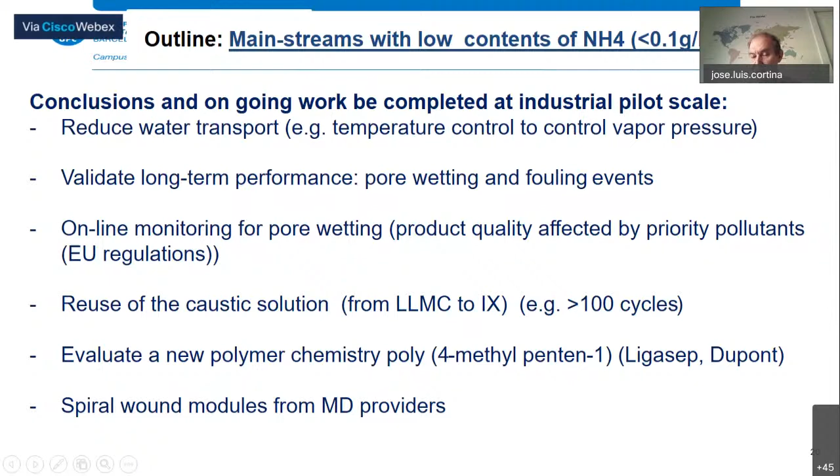This is in relation to the work done when we were treating the mainstream with low contents of ammonia. But in the time that I have, if we come back to our scheme with the nitrogen mass balance, remember that we have been trying to check if we recover the ammonium from the streams that are generated here.

But there is a second possibility: to recover the ammonium from the stream generated in the anaerobic digestion. This is a smaller flow rate compared to the mainstream, with a more concentrated solution. Typically we face streams having from over 0.6 grams per liter up to probably 1.3 or 1.4 grams per liter of ammonia.

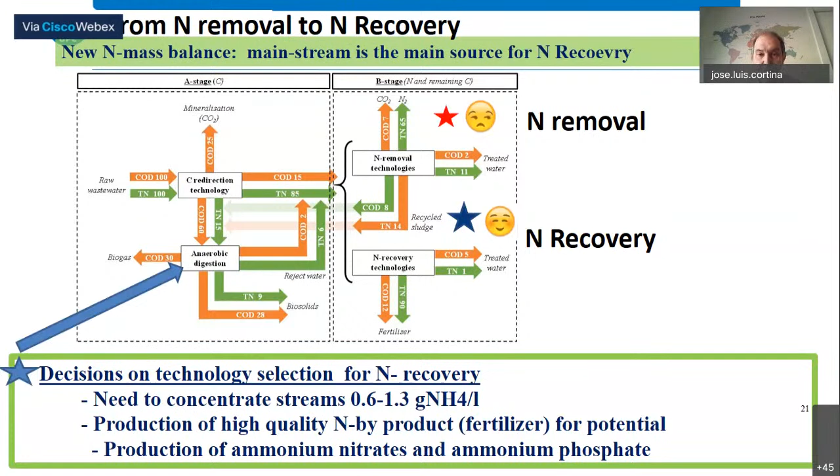The conditions of our requirements were the same. This project is a demonstration project run in a wastewater treatment facility in the south of Spain. The project is devoted not only to recovering ammonium salts, but also to recovering the phosphate present in the water.

Some of the units were built at full scale. For example, the elutriation stage to recover phosphate, and the recovery of phosphorus by crystallization. The recovery of ammonium by liquid membrane contactors was developed at pilot scale.

In the last years of the project, all these fertilizers being produced along the project are going to be validated in real scenarios, checking their use and performance with different types of crops.

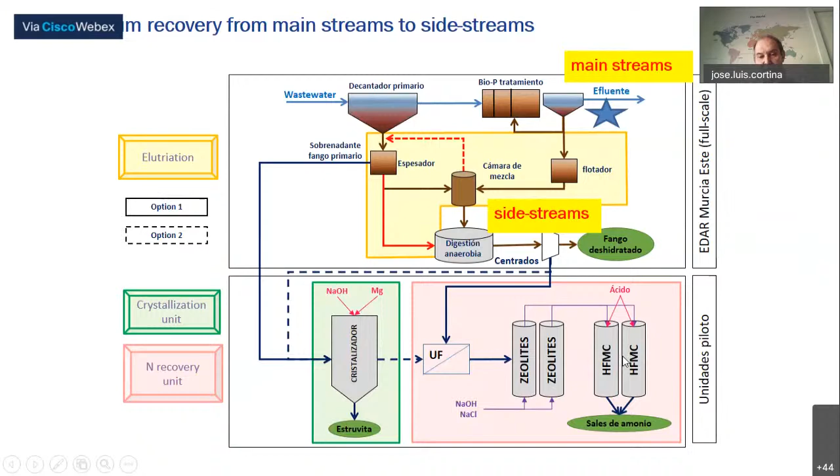If we look at this small scheme, remember that before we were working with mainstreams. Now we are working with the streams generated in the anaerobic digestion stage. These streams are sent first to a stage where phosphorus is recovered as struvite. Then the stream, after the phosphorus removal stage, is sent to a UF stage where we remove the organic matter, dissolved organic matter, and suspended solids present. It is then sent to a zeolite stage, and in parallel, to the next stage with the liquid membrane contactors.

Here you have the scheme of the system. We decided to put two liquid membrane contactors in series. We used these modules from 3M, each one with 33 square meters, the Extra-Flow D007.

Here are some pictures of the pilots at the industrial site. Here is the pilot for the UF and ion exchange stage, and here is the pilot for the liquid membrane contactors. This work is still under development this year, and I have some preliminary results, but we don't have time to show them today.

What we've been working on in parallel is integrating the knowledge we developed previously to build a one-dimensional model to be used as a projection tool, a design projection tool. We integrated different mechanisms that we identified.

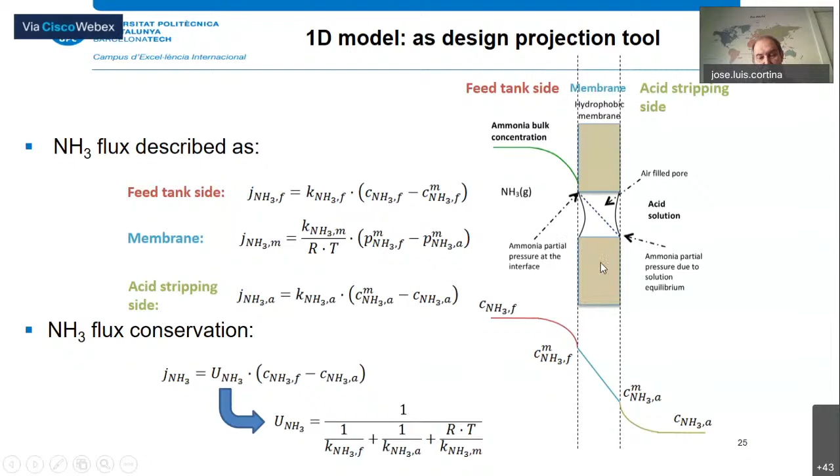The transport of ammonia through the micropores, and also, in a similar way, the transport of water that we also have through the micropores. We integrated all the mass balances in the different parts of the system: the feed side and the stripped side. We followed the changes on the feed side, and also all the changes due to the volume of acid we add to produce the liquid fertilizer.

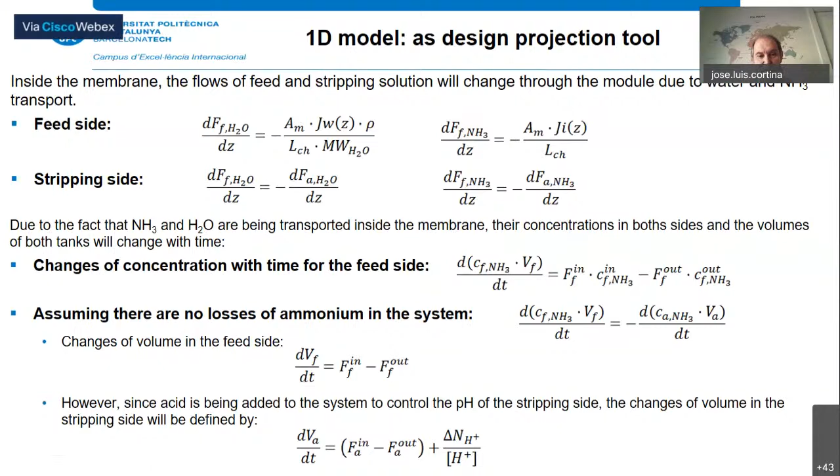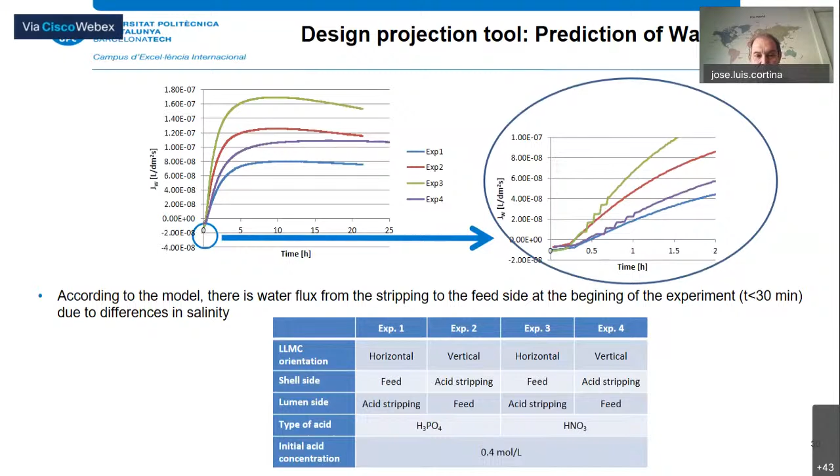As we mentioned, originally the water is transported from the stripping side to the feed side, giving negative values for water transport. As the concentration in the stripping phase increases, water starts being transported from the feed side to the stripping side instead. We were also able to determine the permeability parameters for both ammonia and water, giving us a good design projection tool to be used in deploying this technology for ammonium removal from wastewater.

Then, just to finalize, this second part with the side streams is a part of the project that's still going. We hope to finalize the pilot campaign with this 1 cubic meter per hour pilot. We are facing some problems with the treatment of the water coming from the crystallizers, and the UF stage is providing some problems.

Now we are evaluating some alternative low-cost pretreatments to overcome these limitations in the ultrafiltration stage. We are also developing, moving from the one-dimensional to a two-dimensional model to describe the transport of ammonia and water. Finally, we are going to get two small pilots, one using spiral wound modules from Solar Spring, and we hope to also check a new technology developed by a company in the Netherlands, CBAP, that uses low-cost membrane modules.

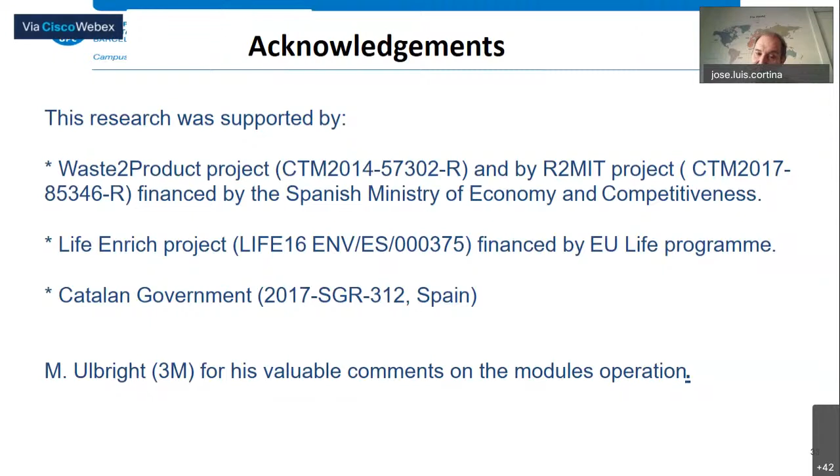Thank you, Professor Jose Luis Cortina. I think this was a very enlightening talk, and we could see some pilot plant experience of your hollow fiber contactor work, which is really interesting. I also appreciate that you discussed all the problems you faced and how you resolved them.

So I have two questions from the audience, I'll take them one by one. The first question is: do you expect any change in performance if the material of the hollow fiber membrane is changed from polypropylene to PVDF, ECTFE, or PTFE?

Okay, this is a very good question, because in fact the market for liquid membrane contactors, at least the market available in Europe, is mainly in the hands of 3M. Even though 3M acquired Membrana and Hoechst Celanese, let's say all these companies, they are not interested in other materials; they only commercialize polypropylene modules. But I think moving to PVDF or PTFE would improve, or reduce, the water transport. Water transport has been a large challenge for us, because when you get a pore wetting event, removing the water from the micropores is quite difficult.

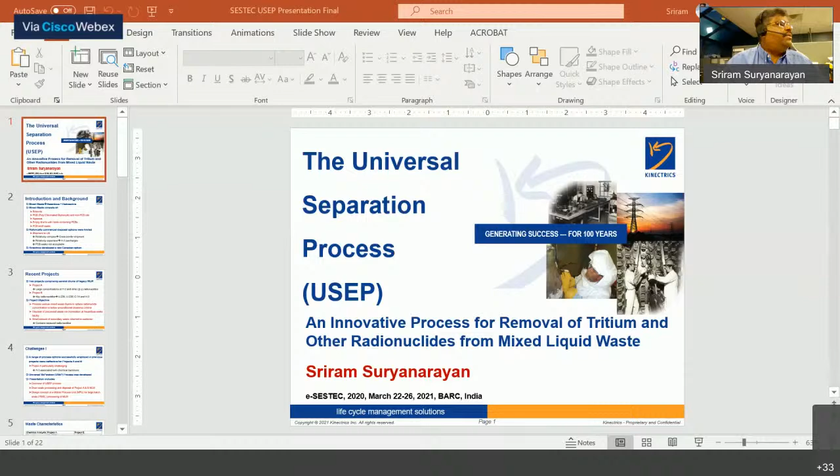So let me go to my presentation. Go to F5. F5. Yeah, that's perfect. So are you able to see my presentation now, or are you able to see the notes page also? No, again, it's gone to your note page, not your PPT. You have to put it in slideshow. So does it now show all the background notes? And now it is still moving. It's still showing the note.

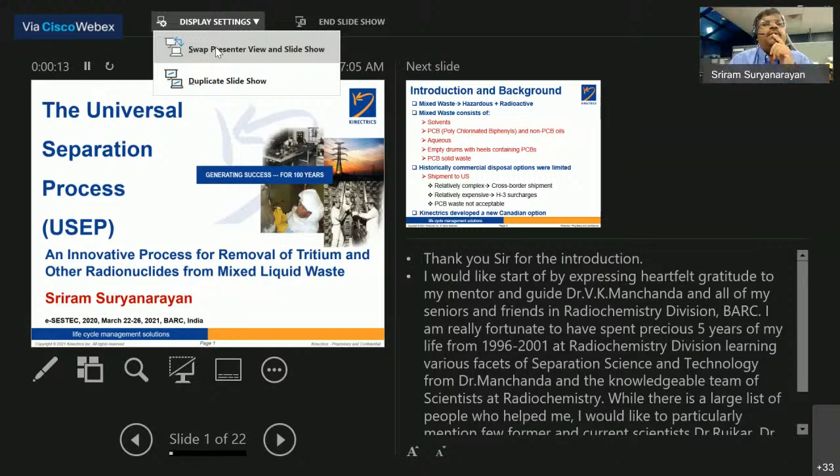Oh, you said display settings, the next option, no, second option, duplicate slideshow. Is it better now? Yeah, just click it. Yeah, this is the option. It is now visible properly. Proper show is there. Okay.